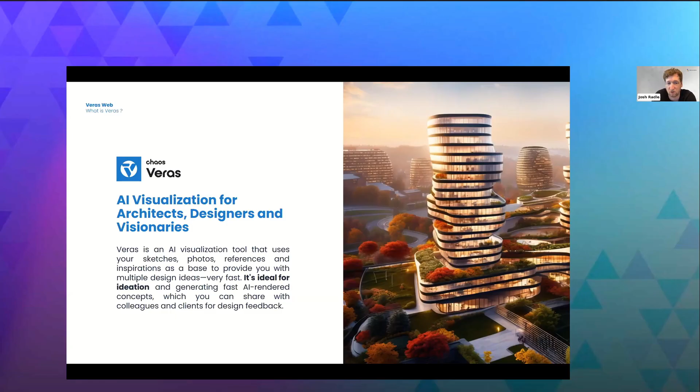So, like I said, we'll look at Veras for the web. So, what is Veras? For those that are not familiar, Veras is our AI visualization tool that uses your sketches and photos for reference images, and it will create basically renderings for you very, very fast. So what you can use for the early stage ideation phase, the conceptual phase, and all the while to give your clients feedback on what this design could potentially look like.

One really cool use case is the ability to upload. So with Veras Web, you have the ability to upload images. This was a really cool example that we put together where you can use a hand sketch.

So a lot of times when we're talking about the concept and ideation phase, how do you come up with an idea of what a building could look like? More often than not, people are hand sketching or going to Pinterest and grabbing reference images, making mood boards, or making big boards that have a bunch of different images, and then kind of mashing that all together in Photoshop or another image authoring tool to generate a concept to show the clients of what a space could look like.

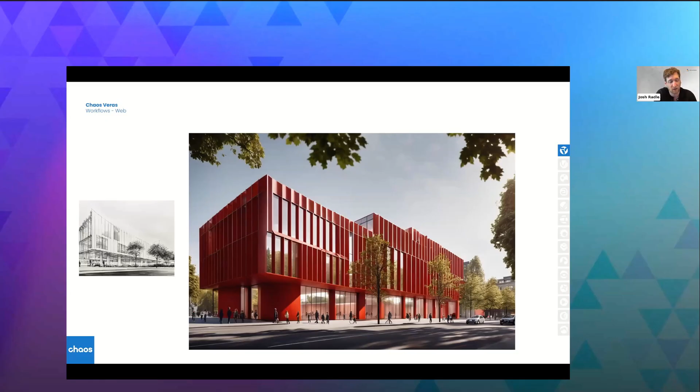So with Veras, what you can do is upload hand sketches or photos of something, and then use some creative prompting techniques to generate ideas of what this facade could look like. So you can see on the left-hand side a hand sketch of what a rough idea of the facade would look like. We wanted it to be like this red finned facade. So we did some creative prompting and we got some really nice results out of it.

So again, this is something that could be used in the very, very early stage designs, when we're coming up with ideas of what a space could look like.

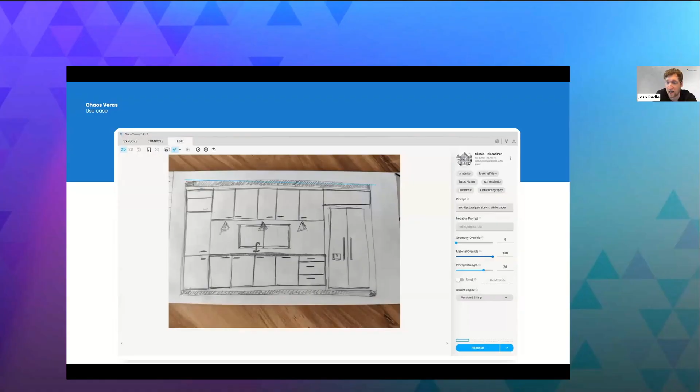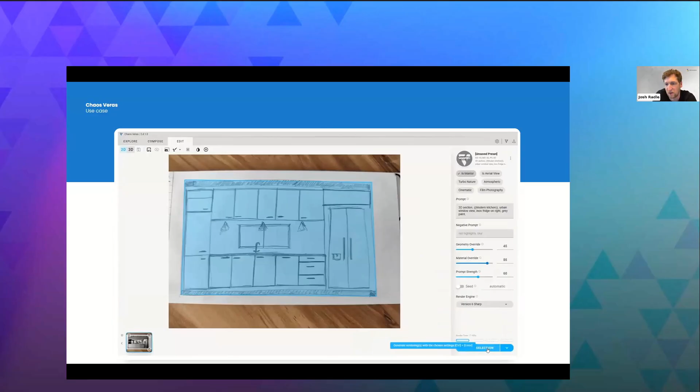Another really cool option that one of our teammates did was take a hand sketch and then use the selection tool inside of Veras. Using some creative prompting, we can see the geometry override turned up, material override turned up, and the prompt strength adjusted. Then we hit render selection, which generates a couple concepts for us, all based off of a hand sketch.

That's where Veras becomes very powerful, to be able to start generating ideas for how we want the design to move forward.

Veras also comes with a couple different presets that you can utilize to start generating ideas with. We can see the first one up is a hand sketch again, and we went to a watercolor mode and a couple other styles. So all on the right hand side are the different presets that come with Veras.

You can also save these presets as well. If you customize them and get a version that you really like, you can further customize them and save them up inside of your My Presets, and those can be saved throughout the company as well.

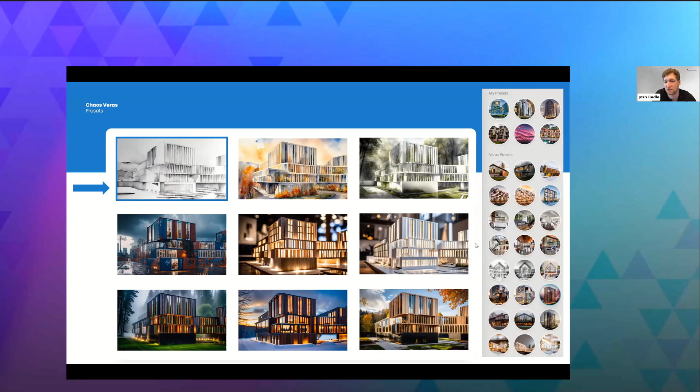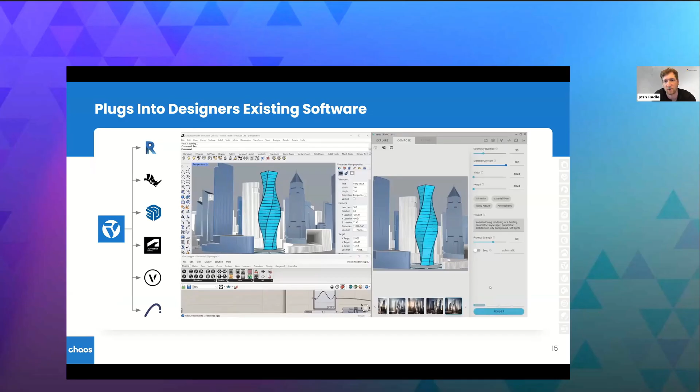In addition to Veras Web, Veras also has plugins that plug into all the different design applications we can see on the left: Revit, SketchUp, Rhino, Autodesk Forma, Vectorworks, and ArchiCAD. Same as Enscape minus Forma, but we can see we're in the Rhino window generating some different versions, and on the right-hand side Veras is updating to what is seen inside of Rhino.

Another really powerful feature of Veras is the ability to have that same style, that same look and feel, throughout multiple different images and multiple different angles of that image. Unlike some of the other AI models on the market, it's really hard to replicate that same look and feel and same style through different angles of the model.

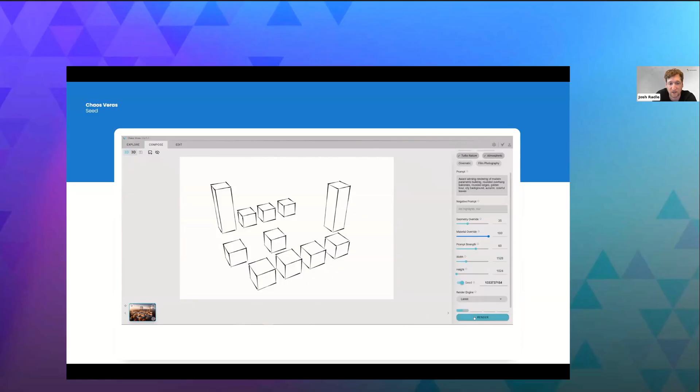This is where Veras has a seed option. It generates a random number, and if you click the seed option, that number comes into play. You can rotate the model, have different images uploaded as well, and that same look and feel and same style will stay true throughout the different renderings.

So that was Veras Web. Now let's check out Veras inside of Enscape. What are some of the benefits you get with Veras inside of Enscape?

Some of the benefits you get with this are it lives inside of Enscape, so you get the high quality viewport, you get the live sync with Enscape coming from your host design application, and you get much more accurate results and the ability to select objects or materials to further refine those as well.

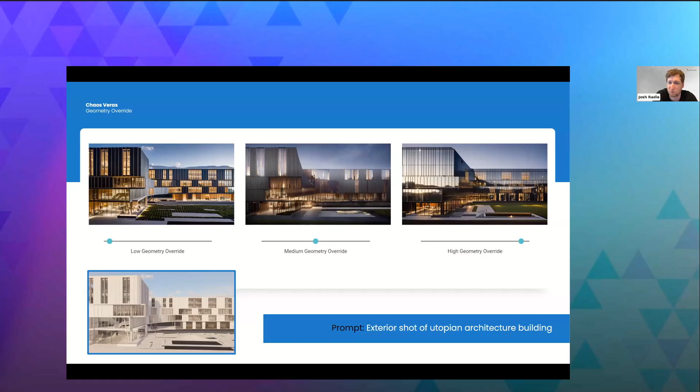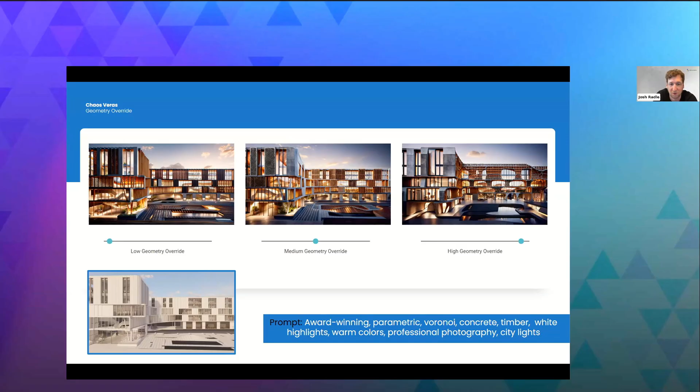Here's an example of a much more fleshed out prompt: award-winning parametric voronoi, concrete, timber, white highlights, warm colors, professional photography, and city lights. We can see what that's doing to the base image from Enscape as well. With the high geometry override, it really cranks it up and does some very interesting things with it, but you can prompt it to however you would like that to be.

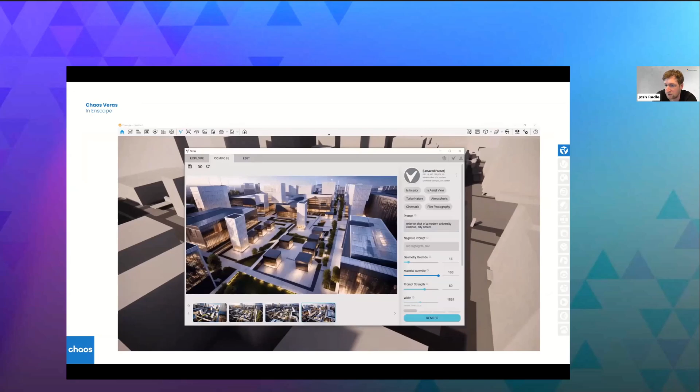Here's an example of how it works inside of Enscape. We can see the Veras button. This is a massing model, so just to show how quickly you can generate concepts, click the Veras button, put the prompt you would like, and it generates a couple different ideas very, very quickly of what this space could look like for you. Again, it's using whatever's inside the Enscape window as the base image to further start working on.

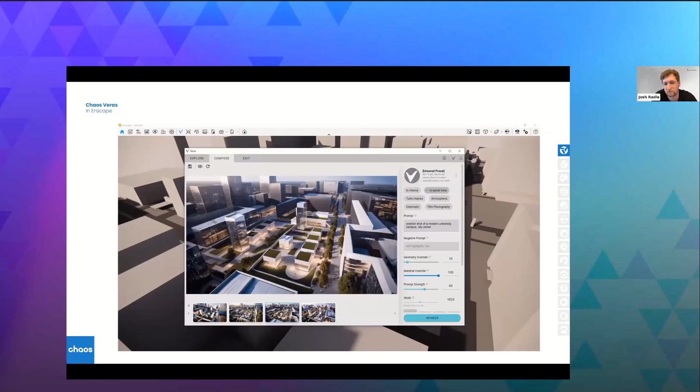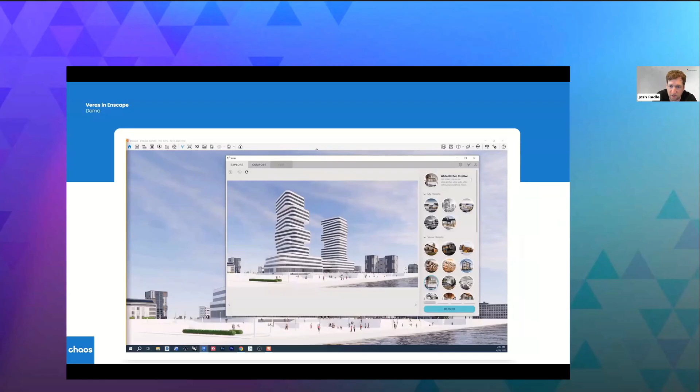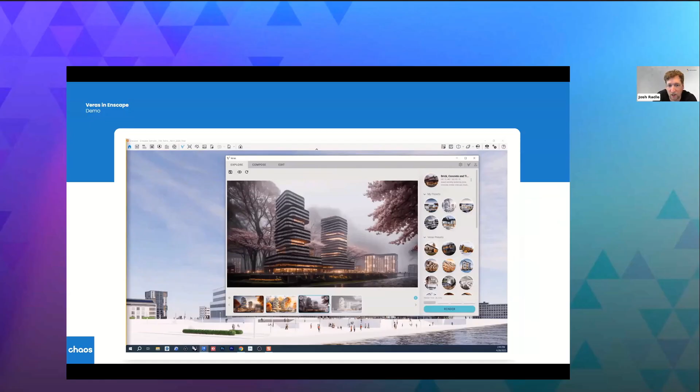Another example of Veras inside of Enscape, clicking the Veras button. We can see it's got the Enscape window with the Enscape image inside of it. Click a preset—so that one we're doing the modern building in fall. We can see a couple different presets applied to that Enscape image: the watercolor one, a more atmospheric one, and this one is more of a chipboard looking model.

One of the other benefits is being able to select objects or materials inside of Veras, inside of Enscape, and further refine individual parts of the model. So we can select the floor and change just the floor we'd like—we're switching that over to polished concrete. We switch those chairs from red to blue, further refining the image based off of the selection and information coming from inside of Enscape, which ultimately comes from the host design application as well.

Each render takes roughly about 20 seconds or so to generate. You can see down the bottom all the different versions we have as well. You can save those, delete those, and also keep refining past images.

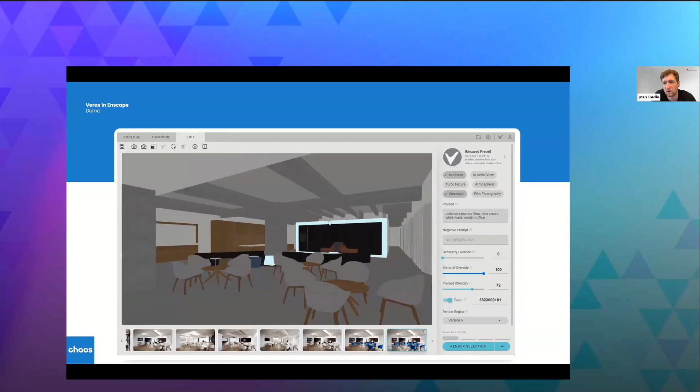With one of the new features that just came out—last week at AU, at the time of this recording—is Veras Video. This is a very, very cool one for us. We had a lot of really good reactions to it, so happy to showcase this to you guys.

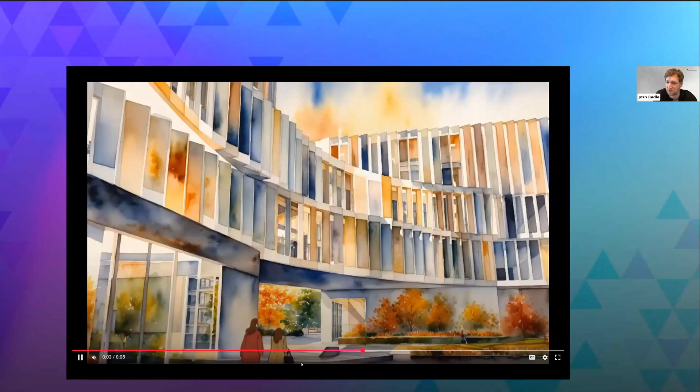Check out a couple other examples. You can also do different styles as well—again, this was all from a still image. So we can do some really nice, interesting effects.

This was again a still rendering from Enscape. This woman is not real—she did not come from the Cosmos library, the Enscape asset library. The prompt was 'woman walking into the living room and holding a piece of paper, reading a piece of paper,' and we can see what that did for us. It was a simple 5-second clip, but very powerful to be able to add some extra little realism to your images.

While we were at AU, we were having some fun with it. One of our team members took a picture—this is not moving—and he animated Lego people, telling the prompt to have Lego people walking in. This was just from a still image, walking into Autodesk University, and Lego people were moving in. It also animated the TV—that screen was not animated at all, it was just a still image. We had some more fun too, animating minions coming in. You can really have a lot of creative fun with Veras Video, but again none of these people were moving—this was all a still image.

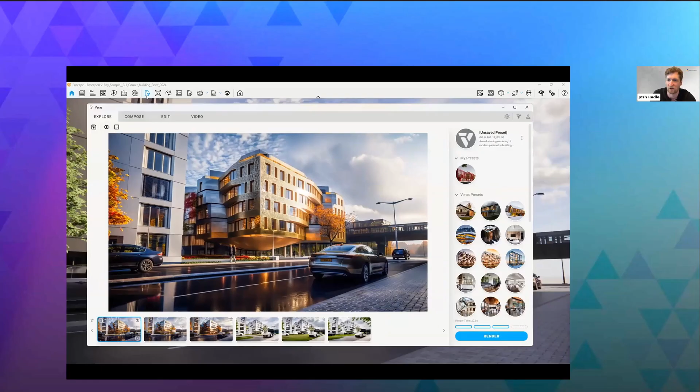Now let's jump in and I'll show you guys a couple examples as well. Here we are inside of Enscape, with the main image, and all I did was launch the Veras button. It used my main image as the base to start with, and all I did was select a preset that I wanted, and from there it generated a couple different variations for me.

You can even generate styles based off of specific architectures or architects—so this is in the style of Zaha Hadid. We can go to the compose feature to see what the prompt is doing: 'white building, Zaha Hadid, high quality exterior photography.' Whereas this one was 'award-winning rendering of modern parametric building, golden hour, city background, autumn colorful leaves.'

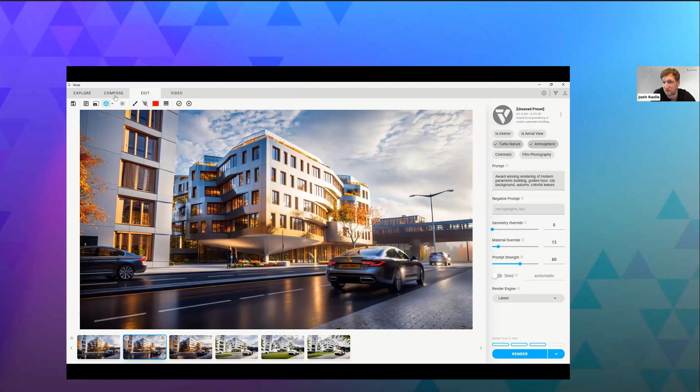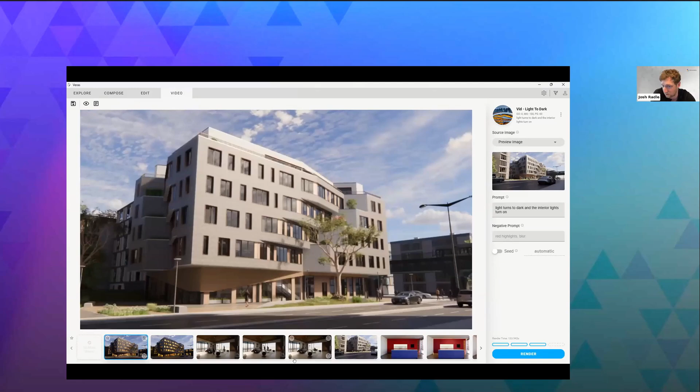So here's a couple I previously did just to try some things out, based off a still image. Remember, Enscape doesn't do animation, but we can make it do animation with Veras Video. These cars were just in a still image, and it goes and fully animates those. This one was light turning to dark with interior lights turning on, same with this one, just a different variation of what it gave us.

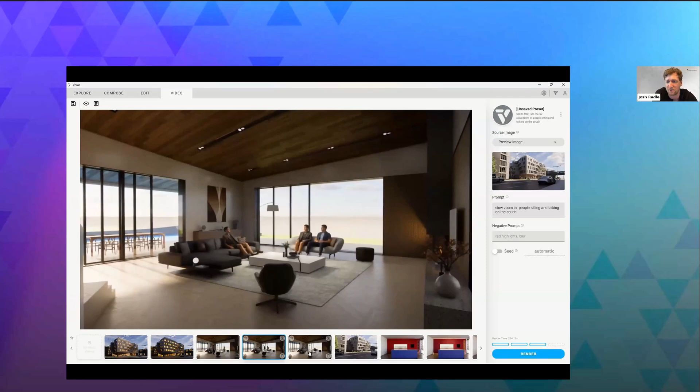Another fun example we did was telling people to slowly walk into a scene and sit down on the couch, which is very cool because the characters will actually look at the Enscape assets and respect that, and sit on them. So a lot of really cool functionality you can do with this to further fine tune and make these images more engaging.

This was a fun one. Again, it's almost limitless possibilities. I wanted the building to explode into another building, so a really cool transition.

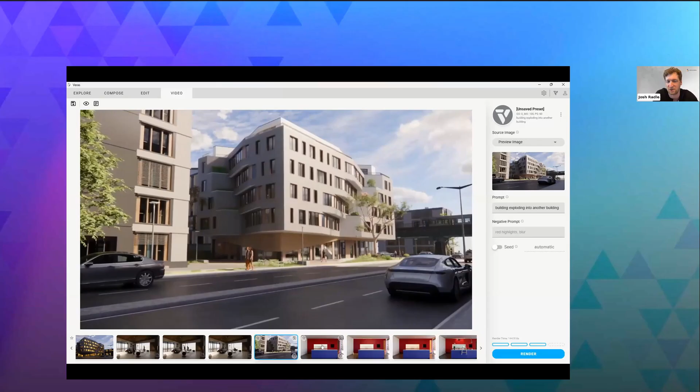This was an example of a kitchen transforming into another kitchen with red painted cabinets, subway backsplash tile, so we can see what it's doing, again all from a still image. A couple different examples that it gave me here.

I wanted to try and see if we could get some assets to start dropping in. Again, these assets are not coming from the Cosmos library, the Enscape asset library. These were all generated by Veras Video. So it gives you a really nice, cool drop-in effect as well.

And then again, sticking with a couple of the characters walking in, these ones had some chairs dropping in. Again, with more characters walking in, they'll actually go in and respect the Enscape assets, which is another benefit of having that information tied in there. There's more models being built up inside the still image, cars being animated in the background too.

Simple transition of a facade change. Again, vehicles are completely still inside Enscape, but being fully animated in Veras. This was a modern building morphing into another building with a metal facade. Again, possibilities are limitless, and you can tell the camera exactly what you want it to do. I told the camera to slowly zoom in.

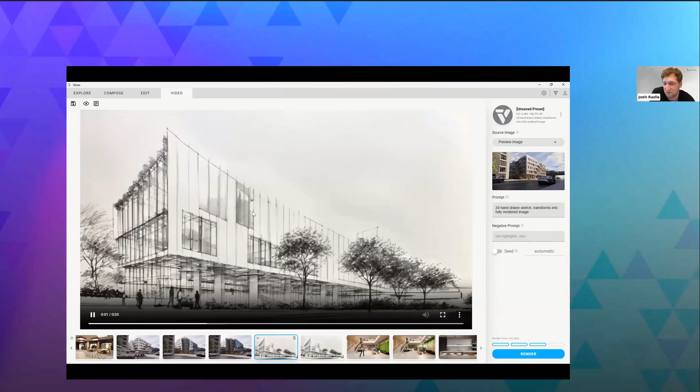You can even animate hand sketches. This was that same hand sketch we were looking at initially, and it starts animating some people walking around. If I wanted to, I could have the camera do a nice subtle zoom in. But again, possibilities are endless with this—the only limit is your imagination.

Simple material change, again all from a still image. This was an Enscape rendering out of SketchUp. A couple more examples of this, but again, the possibilities are virtually endless.

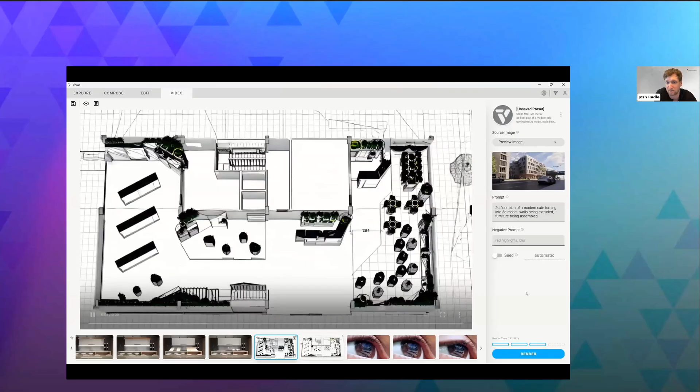We can see the prompt here: modern kitchen, marble countertops, transitioning into subway tile countertops, cabinets, some assets being dropped on the counter, having some fun with 2D floor plans being built up as well. So again, all for the concepts and ideation phase—you can even use this for final polishing as well.

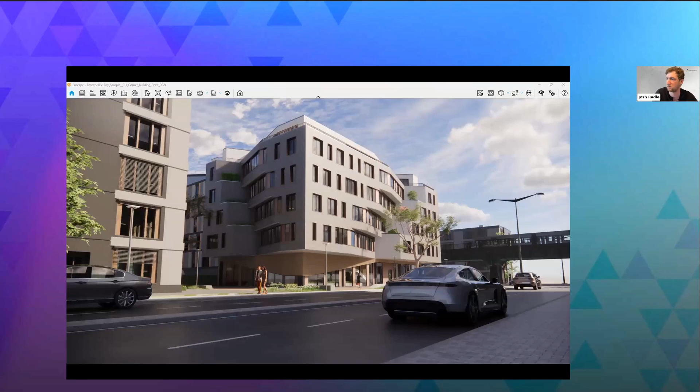All right, with that, that is Veras. We can definitely set up another one if we want to dive deeper into Veras at all. We do have a prompting guide on our website that we can look at as well, and we'll be sure to get that to you guys. Let's jump in and check out what we have next.

All right, so the next tool up is a tool called Helix. This is going to be really good for interoperability. Helix is a tool that will convert models between SketchUp, AutoCAD, Rhino, and Revit, making sure the geometry flows between all the different design programs without losing any ability to communicate on the design.

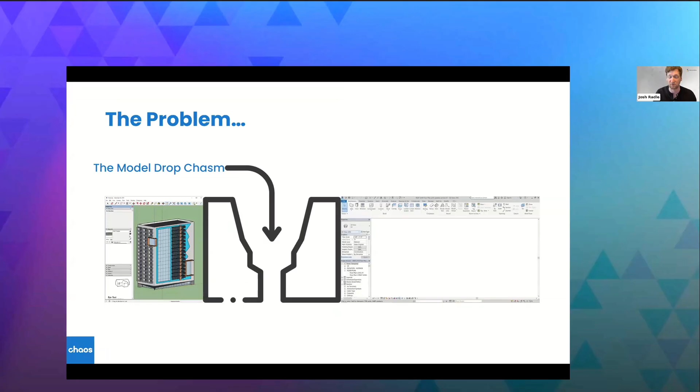So like I said, the problem trying to go from SketchUp into Revit or Revit into SketchUp, trying to connect those programs and translate the geometry between them, is really very hard to do and very time consuming. But this is where Helix really comes into play.

So we're looking at SketchUp on the left-hand side and Revit on the right-hand side. With Helix, what you're going to do is pull up the Helix window, and then select all the different SketchUp components and groups you have, and assign those to Revit families and different Revit types. So we can see some components come in as a Revit wall category or wall family, and you can specify which family you want that to be brought in as.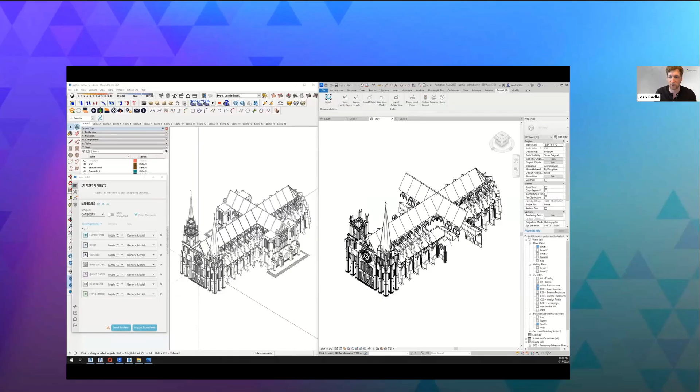Same with components, anything like that. Those components can be turned into Revit families as well. So it's a little setup on the front end, but then all that geometry is going to come across inside of Revit in the correct categories with the same native Revit geometry that you associated with it.

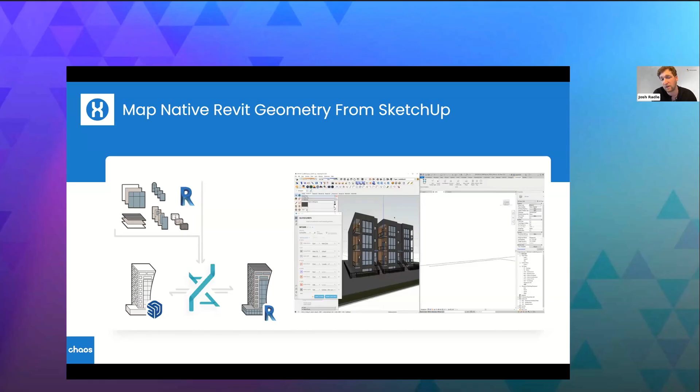So again, map native Revit geometry from SketchUp. We can see what that's doing there. A little manual setup on the front end, but once that's set up, it's a nice seamless transition to send that geometry over to Revit and continue working. You can set components - this one has a component for a railing. You can tell that to become a railing type or railing family inside of Revit, ensuring that geometry comes across and is workable.

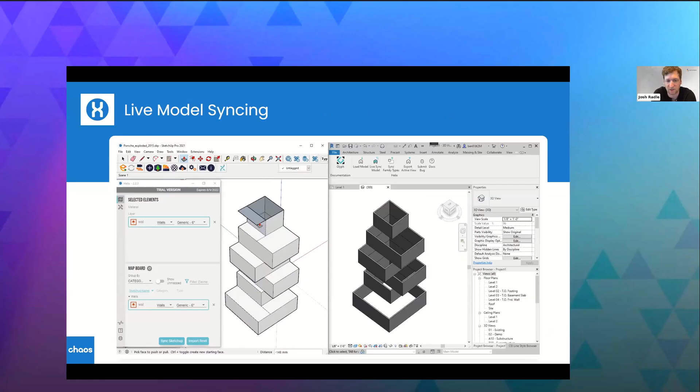Another example of the live modeling - you can turn on live sync so you can see changes happening instantaneously. We can see these walls are generic 6-inch walls, and anytime there's an update, it'll update inside of Revit for you. You just hit sync with SketchUp, and all those changes will be taken into account inside of Revit, and vice versa as well.

We can see here you can create, read, update, and delete geometry as well. So the geometry is being updated in Revit in real time. Anytime we make a change, just hit load the model, and it's going to go back and reload that model, looking for those new changes as well.

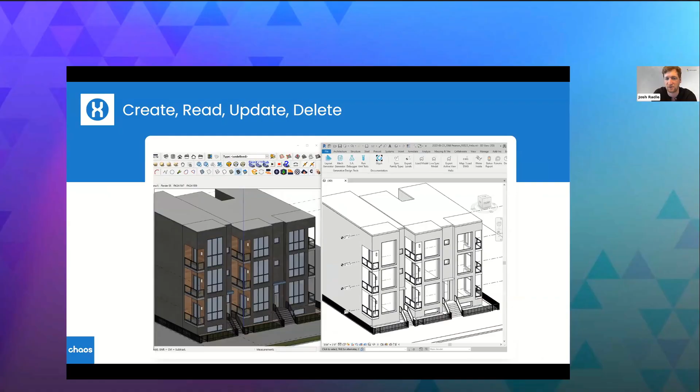Materials will also come across as well. We can see we have materials that were from SketchUp being synced inside of Revit. So all that comes across - you just have to set it up accordingly, and all of that will come across.

Another really cool thing is being able to bring shapes with DXF support. A lot of times trying to model something in Revit might be a little time consuming. So if you find a piece of geometry or furniture inside a different program, like a SketchUp warehouse, or model it in Rhino or SketchUp, you can bring that across and tell that to become a Revit family or a Revit component, or a Revit model-in-place family, however you set it up. All that geometry and material will come across to Revit.

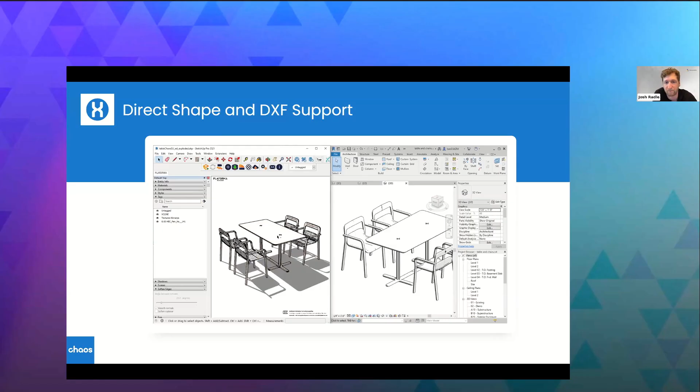You can also go from Revit to SketchUp as well. Like we looked at the mapping system, you can tell a Revit family to go across and be that type of component, or that type of group, ensuring a nice seamless transition between the different design applications.

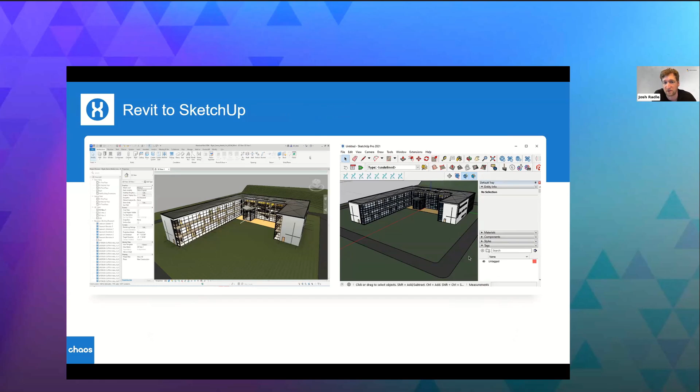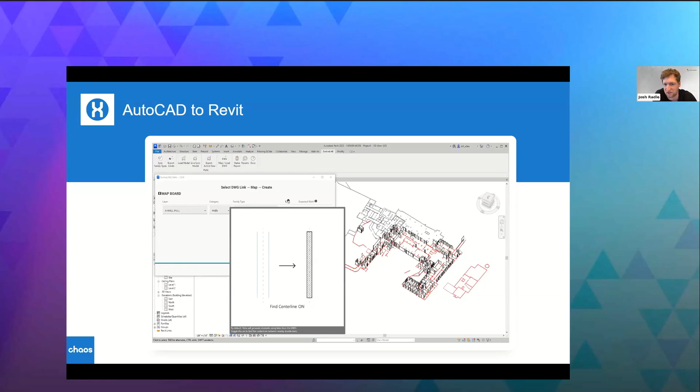All right, so that was Helix. The next two we're going to look at is called Morpheus. This is our cool generative design tool - a generative design application for Revit. It facilitates real-time responsive design solutions, allowing seamless co-authoring and integration with the Revit environment. This is going to be really cool for space planning. We can see here we have a space, and then we started up Morpheus, and from here we can start laying out different arrangements.

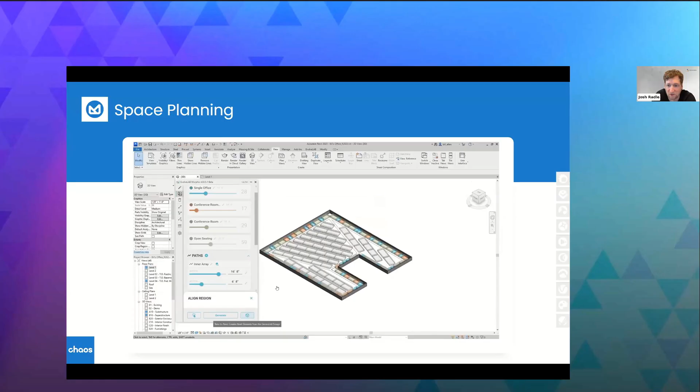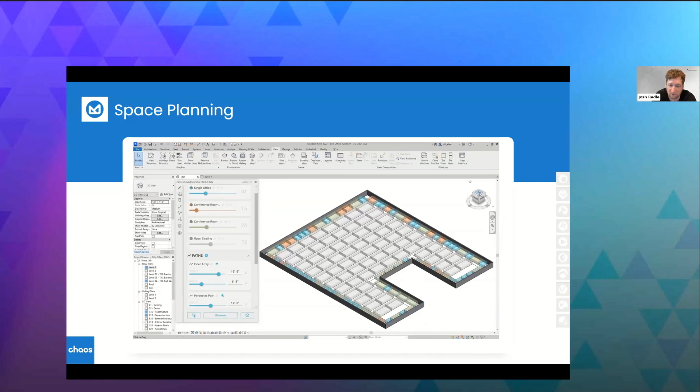So we can see we're setting up a single office, conference room, two different types of conference rooms, open seating arrangement as well, and then you can draw out the path, and then you can generate all of that into the different Revit components that you would like that to be. So each one of those little squares can become a Revit component or a Revit family of your choosing. This is where it becomes a really good way to start laying out layouts and for space planning in real time for you there.

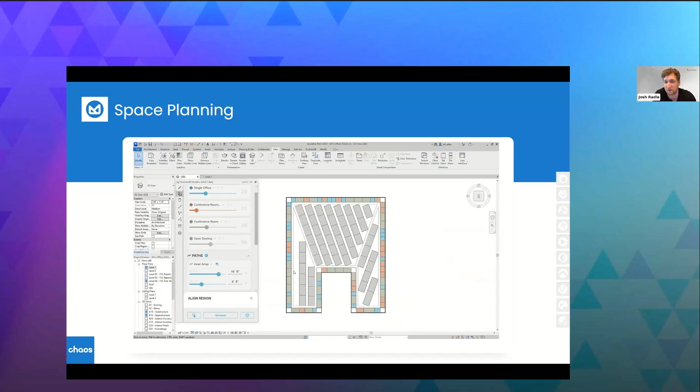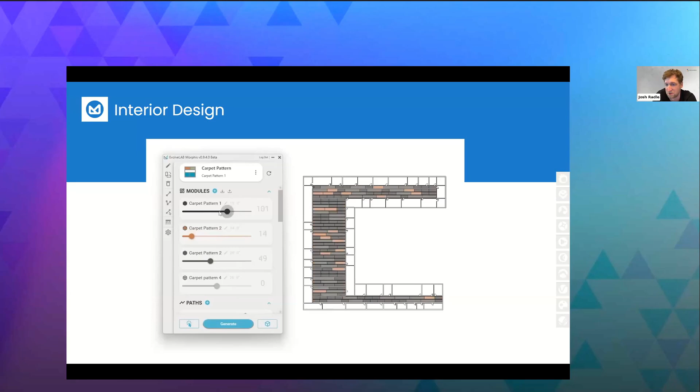Another really cool thing that Morphis can be used for is interior design. You can generate different carpet patterns for you. So we can see we're just adjusting some of the sliders. Again, all these modules are completely customizable. You can build your own modules as well. All of this is completely customizable to however you guys want. Multiple different use cases - we're just showing you a couple different use cases today.

The next one is for seating layout. This is where we can lay out a whole auditorium seating layout as well. So you set the width, you set the width for the different seating arrangements as well. You can do the different array options, so you can set the rotation. And again, all of these are customizable, so you can set up these to however different seating arrangements you would like. You can set the regions as well. Again, you can pick on the different areas which you want that to be locked to.

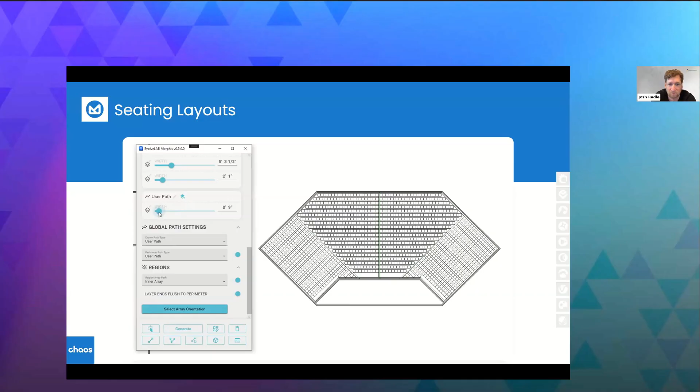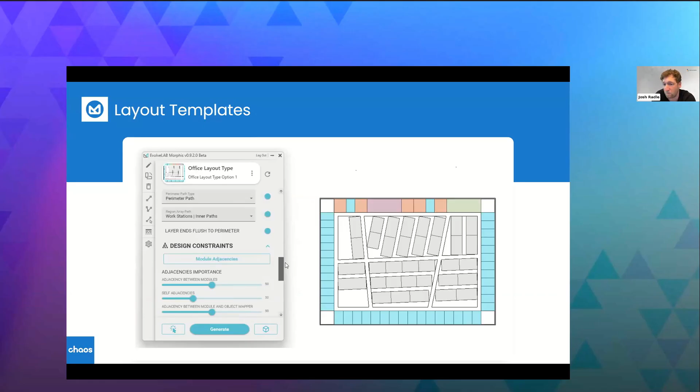You can also use for layout templates. This is where we have a couple of different templates set up for you. Again, you can also create your own different layouts as well, so you can start setting up company standards that you would like. You get a couple that you really like, and again, you can save those as different presets and distribute them throughout your company.

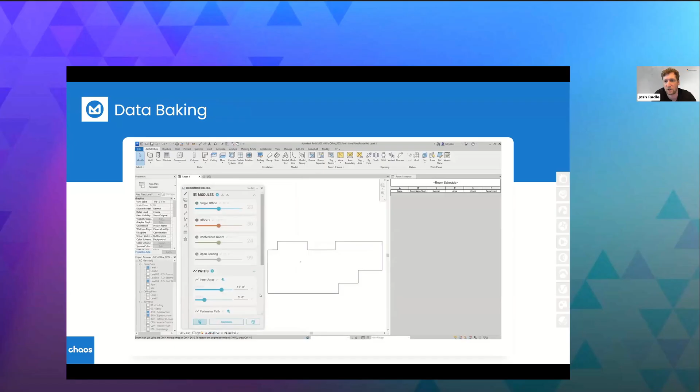You can also, like we said, assign - so all those little individual blocks can be associated to a Revit family, and then again, those are all scheduled correctly. Like we could see, you can bake all that data in, and again, it'll show up in your room schedule for you there.

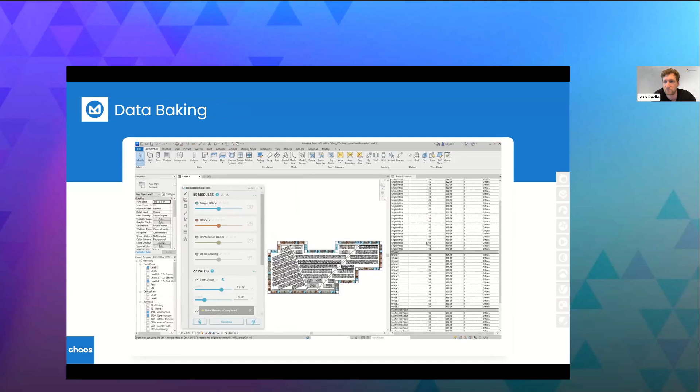All right, then the last tool that we will look at is called Glyph. This is a very powerful tool, a Revit plugin. It automates and standardizes multiple documentation tasks like view and sheet creation, tagging, dimensioning, sheet packing. You can also customize these into bundles as well, so you can automate all these different processes in just a single click.

One of the problems that Glyph solves is it's meant to help out with those repetitive tasks that take a lot of time on every single project - creating plans, creating elevations, tagging and dimensioning views, creating sheets, and then placing views on the sheets. So what if we could automate all those with a couple clicks of a button?

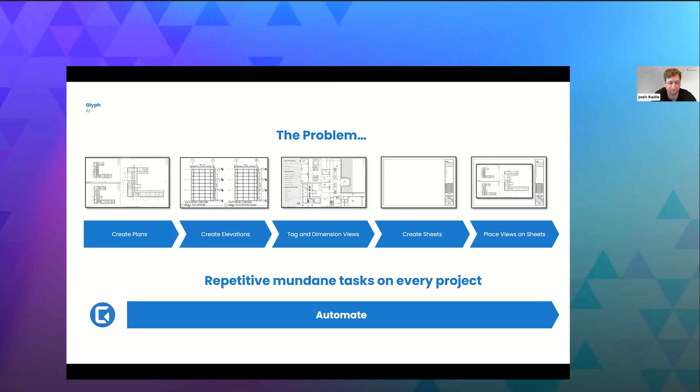So again, we can see we can create views, legends, sheets, dimension views and sheets. You can import spreadsheets. Again, you tell Glyph what you would like to do, and it'll do it.

The first one up is we can automate views. We can create views by level, so we're going to click on the different floors or the different levels that we would like Glyph to automate. And we can go to the settings, and then we want the naming scheme - we can set all that up. And then what we're going to do is simply go make ceiling plan as well.

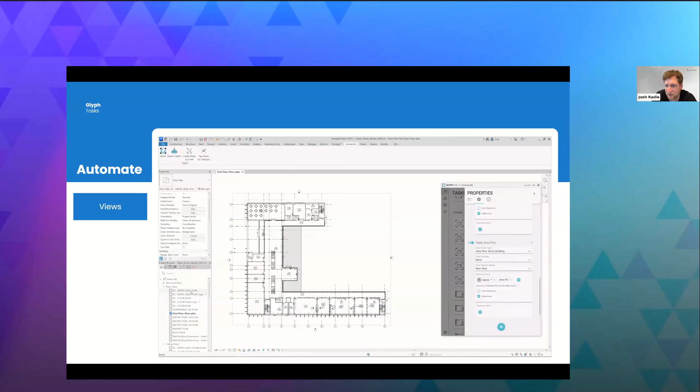We're going to make the structural plan as well, and then we're going to make the area plan as well. So we can see all those - we have all those set up with the convention how we want. And then we're just simply going to hit run task, and that's just going to run through its task of doing everything we've already set it up to do - creating all the views by level successfully. So we can see on the left-hand side in our Revit project, there's all the different views that it's set up, all the different levels that it's set up.

You can have it create legends for you too. Again, on the right-hand side, we can see how we can set that up. So the view template, we can set that up to whichever one we would like, and then from there, we can set some different parts of that - phase demolition, phase created. Simply hit run task, and then from there, it's going to create the legend for you, again, all with a single click of a button.

We can use it for dimensioning as well. So we can go dimension the different elevations, the different floor plans we would like, set up the windows, doors, and hit run task. That's going to go through and run the task of dimensioning all the categories that we set up. So we'll go check this out, and we can see what that's done for us.

So it dimensioned all of them, all the different doors and windows. Now you can go through and automate tagging as well. You can tag views by category. So we're going to set our different views and go to active view.

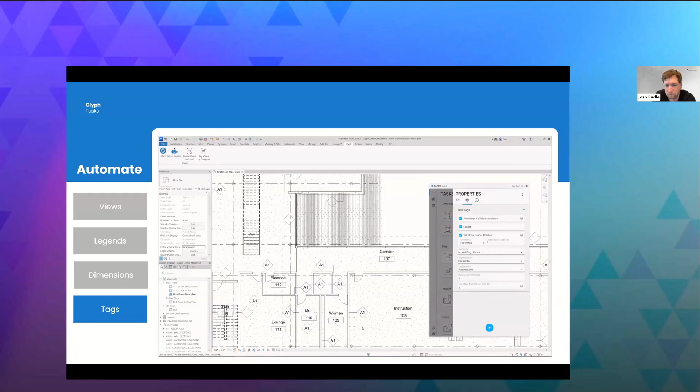Very minimal customization or additional work will be needed. Just maybe go and spot check it, but it should get you 85, 90% of the way there.

And you can also create sheets with a simple task as well. So you set up the different levels that you wanted to create sheets on. And then again, simply hit run task, and it's going to place all those different levels on sheets.

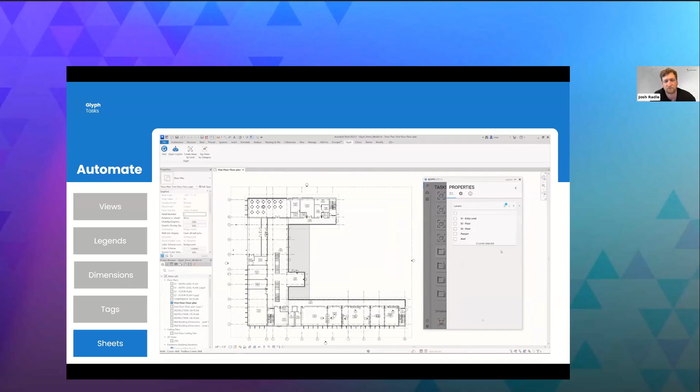There's placing views on sheets. This is where you can actually lay out how you want the different views to be placed on the sheets as well. And this can all be set up as a bundle, done with a single click of a button here. You can see the different options we have inside of the task settings, the different layouts, and you can customize the layouts too, as well, to your company standards.

All right, now bundles. So everything that we just looked at could be wrapped up into a bundle, where you could have multiple different actions inside of one bundle. So if you simply hit play or run task, you can see this one's going to tag ceilings and dimension grids and 3 reflected ceiling plans, again all with a single click of a button.

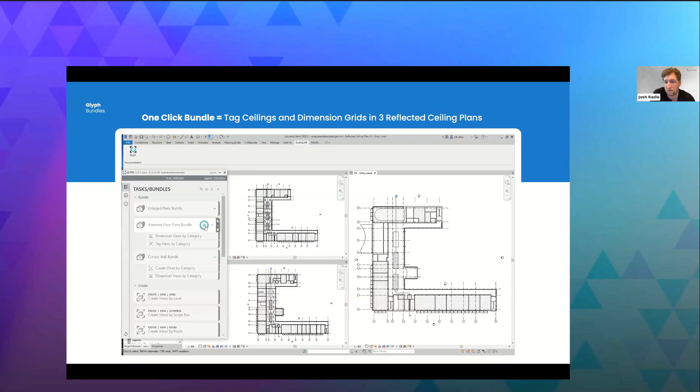Another one you can set up is elevate curtain walls, dimension curtain walls, tag curtain walls, or tag curtain wall panels, place elevations on sheet. Here we can see what that's - the animation's not playing, but we can see all that would be set up in one single bundle there for us. So that's where we can even automate those further, saving us more time. Instead of running each one individually, we could just set that up as a bundle and have them all run one after another.

Well, now what if we could automate all this with Copilot? So we have an AI assistant in automating your construction drawings.

For example, you could tell Copilot create views by scope box for area A, B, and C on level 1, on level 101 first floor. My animation's not playing, but this is where, if you had this view set, or this task set up, or this bundle set up, you could tell Copilot to go run that tag, or run that view or that script for you - essentially that bundle or that task.

Here we go, this one's working. So this one creates sheets by rooms for rooms 101 to 125, and it's going to go create all those different sheets again for what we told it to do. And we can see here it gives you the information when it's done about what it just did. So this is how we can start using Glyph Copilot to help even facilitate and automate all these processes.

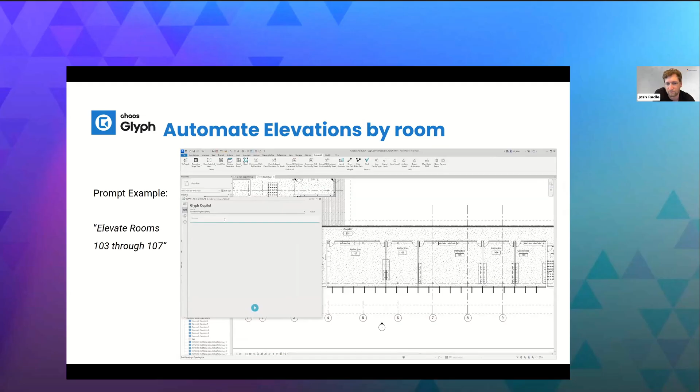So with that, some of the learning resources we have available for these different tools are Chaos Academy. Chaos Academy is a very, very good one to go get in-depth information about what all these tools are doing and how they function. They also have learning videos attached to them, and different little exercises that you can do as well, and you get little badges at the end too. That's where you can really keep your company on the same level of knowledge for all these different tools, and you can track progress as well.

Chaos Docs is another really good one for more in-depth information about what each tool is doing and what each part of that tool is doing as well. We also have webinars, forums, and our blogs are really good resources as well for any information about any of the Chaos products, any of the EvolveLAB tools, and also the blog.

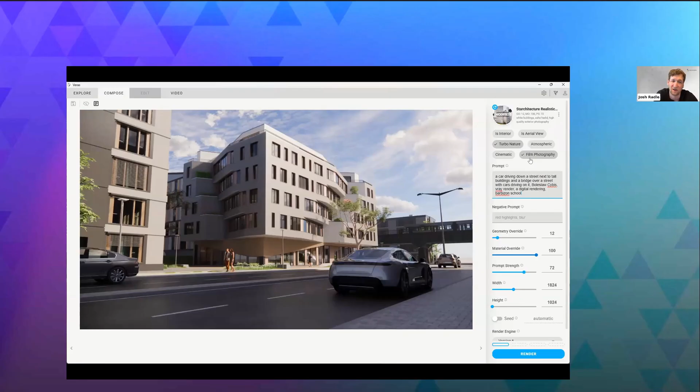And then up at the top here are some different presets as well. You can use Turbo Nature, which adds more nature and vegetation-type elements inside the image. Cinematic and film photography basically do exactly what they say, giving it a more cinematic or photography style rendering, and then atmospheric gives it a nice atmospheric effect—really cool for aerial shots or for things with fog and whatnot.

Is there anything that you know of that's coming up soon? Any new updates? Anything we should be starting to get excited about that you've heard that you can share?

The Veras video was probably the biggest feature we were all waiting to tell people about. When we saw it, we were like no way. We all got to experiment around with it, working with Ben at AU, trying a bunch of different things. We had customers coming and trying different things too. But what this thing can do is truly amazing. I'm personally very excited about this tool. This new feature can do a lot of different things - you only limit your imagination.

You tell it what you want it to do. The fact that I can take this still image from Enscape, just a still image - in Enscape nothing's animated - and it'll animate the vehicles, the turn lights turn on, people will be animated, all from a single image, all while staying inside of Enscape and Revit or SketchUp or another tool we support. That's pretty powerful to do.

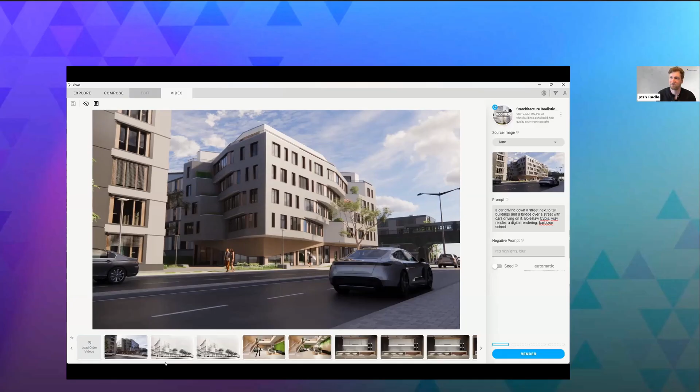Is there any limitation to the video length? It's 5 seconds currently. I'm personally very excited about this one, just what it can do. There's so many possibilities with it, and this is just going to keep getting further enhanced too, with more additional functionality inside of this tool as well.

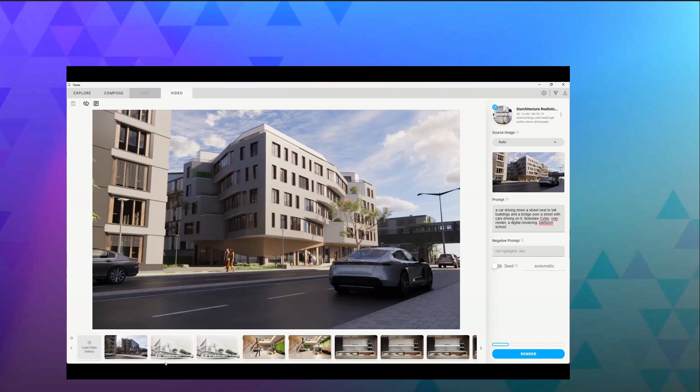Debbie, any questions for Josh? That was all on my list. That was a good presentation, I learned a lot, appreciate it. Well, like I said Josh, we do have a little bit more time if there's anything else you can think of. I love the visuals, I can keep watching.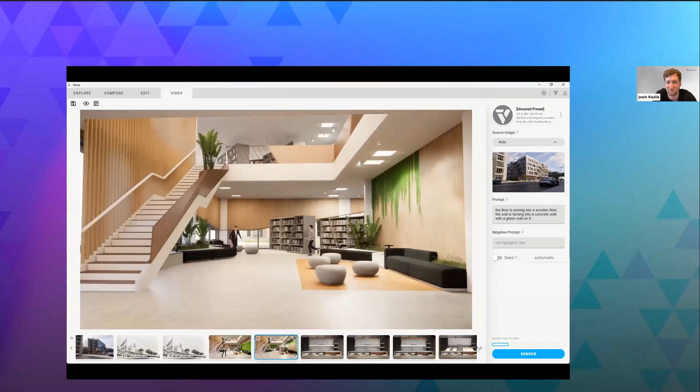And this is available with just any version of Veras? Yep. And again, like this was just a modern building morphing into another modern building with metal facade, camera slow zooms in.

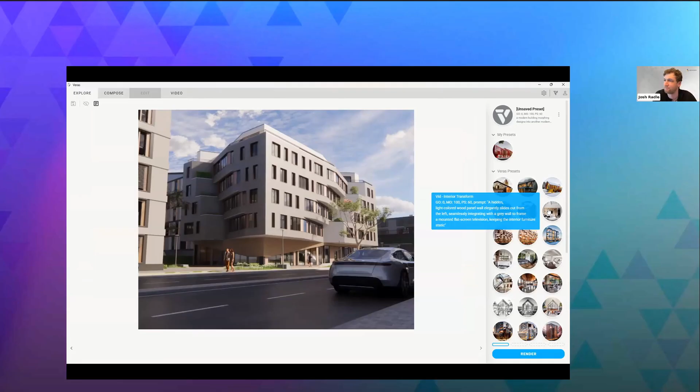So you had presets for some of the videos you showed? There are some presets, yeah. If we go to Explore, this one right here is the video transform - a light colored wood panel elegantly slides behind the TV. So you could do general presets for the videos too, and then refine those further. Yep, exactly.

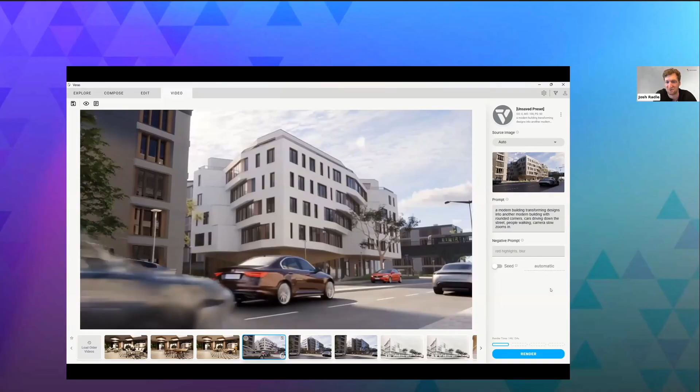I'm excited - this was a very exciting new piece of functionality that just came out. But again, the ability to have vehicles be animated off a still image is very powerful to do.

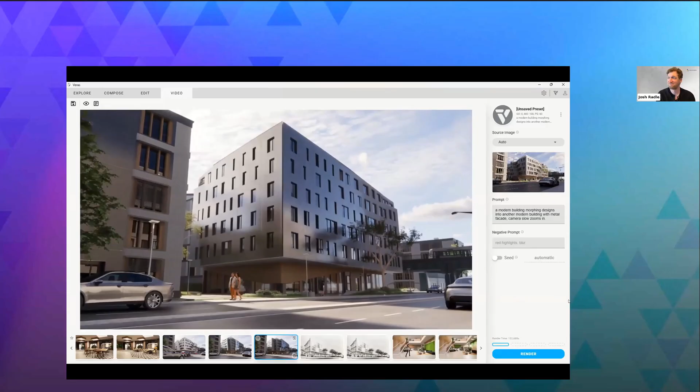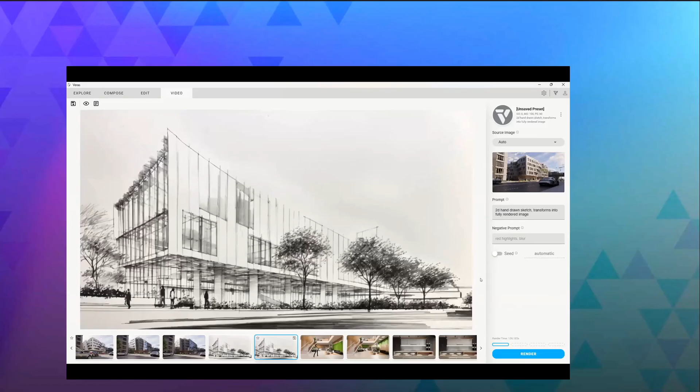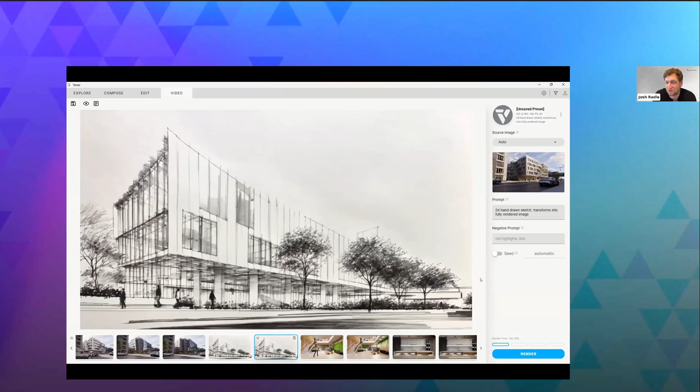Again, we went over Helix, Morphis, and Glyph - those are very powerful tools for once you get the idea ready, to help you actually get the thing ready to be built in real life. These are the tools to help get the ideas going, the concepts down, to be able to go build the project, and then use those with Enscape to help you visualize the model all the way throughout the design process, and Glyph, Helix, and Morphis to aid you throughout your journey of creating the design.